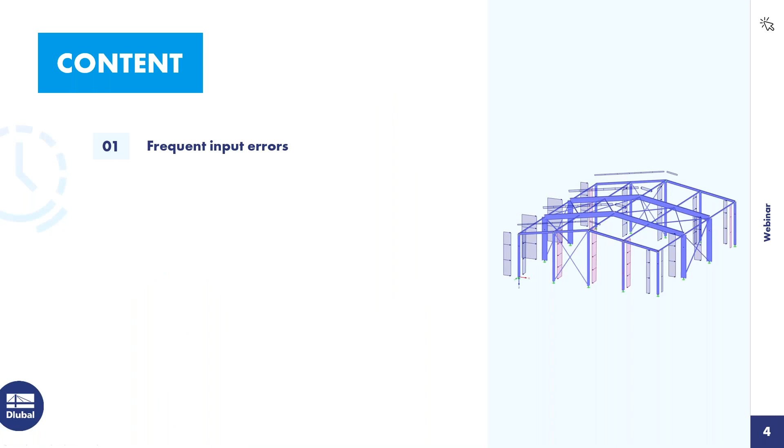To the content today: I will introduce frequent input errors and explain how to correct them. And I will give tips and tricks for the application, for example the FE mesh size, handling singularities, and correcting instabilities, etc.

To the first task: we often receive model files from customers for which not enough wind load cases have been created for dual pitch roofs. According to Eurocode, there are at least 4 wind load cases necessary for the wind direction 0 degrees, and 1 load case for the wind direction 90 degrees, in case it's a symmetrical model. In our example today, we handle only these wind load cases because it's a symmetrical steel hall.

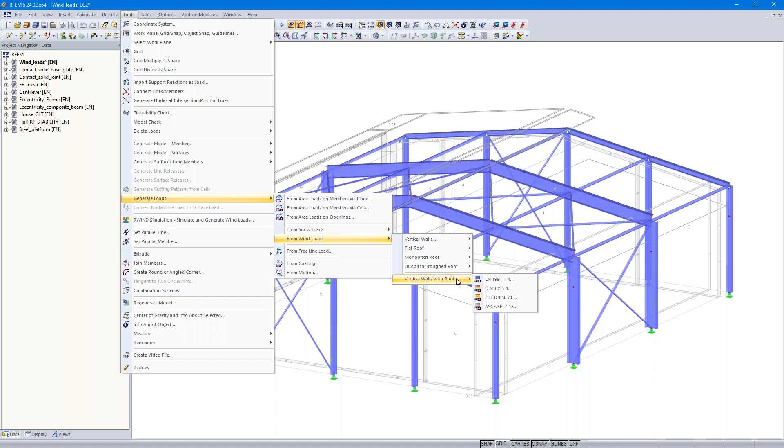Let's turn to the program. That's the example that belongs to the PowerPoint slide. I created a load case, self-weight, and then the first wind load case. It's an automatically generated wind load. For customers or users that don't know where to find it: under Tools, Generate Loads, there are a lot of load generators, for example for snow loads, and here for wind loads on vertical walls, flat roofs, monopitch roofs, dual pitch roofs, and vertical walls with roof. I use this option here.

Okay, let's open the wind load generator. Here you can choose the national annex, the terrain category, structure height, and then you need to define the base geometry by clicking 4 nodes, and the roof type and geometry by clicking 6 nodes. This area here is for the wind direction; in this case I used the AB wind direction, meaning for our example the wind direction 0 degrees. This area here is important for the load on the roof. Those are the 4 wind load cases necessary according to Eurocode: plus plus, minus minus, minus plus, and plus minus.

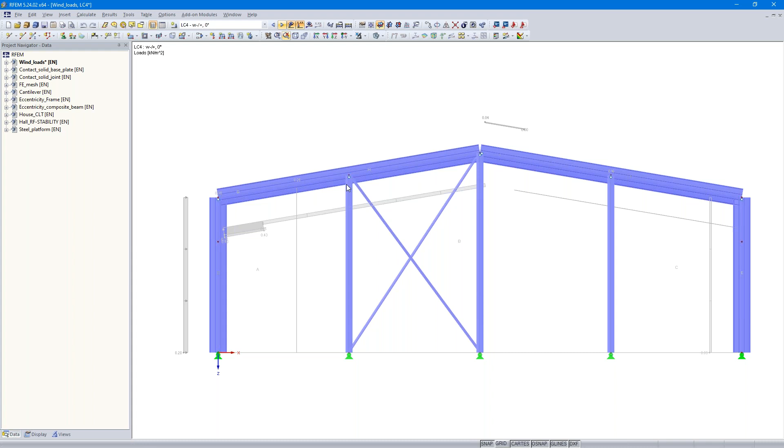Okay, I leave the dialog and switch to this view. You can see 4 wind load cases for the wind direction 0 degrees are created. The first wind load case has pressure on both sides, then suction on both sides, then suction and pressure, and pressure and suction.

Then we turn to the next load case for the wind direction 90 degrees. I open it. The upper values are the same, but the wind direction is now BCD, which as you can see in the picture is 90 degrees. I created, in this case, 2 wind load cases: pressure and suction. Important according to Eurocode is the wind load case number 7 with the suction.

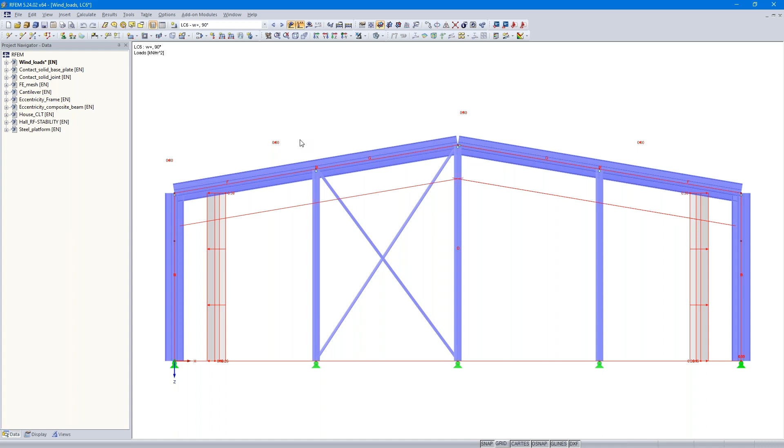Load case number 6 does not contain any pressure wind loads on the roof. It could be possible to consider that the suction from the roof acts as supporting, but that depends on you. Important according to Eurocode is this wind load case here.

Okay, that's all to the wind loads. I turn to the next task, imperfections.

I create a new load case, imperfection towards plus X. I would like to create imperfections for the outer columns on this side and on this side.

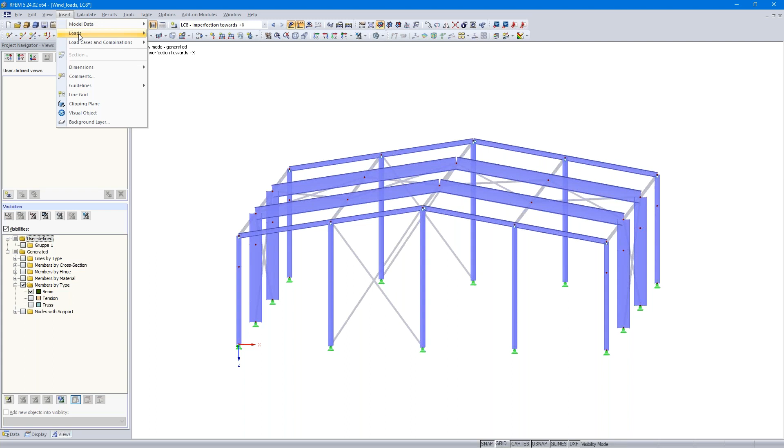I turn to the views navigator and use the visibility mode for beams. Then I open insert, loads, imperfections dialog box. I don't care about these values here. Important for me today is this area: members, list of members, sets of members.

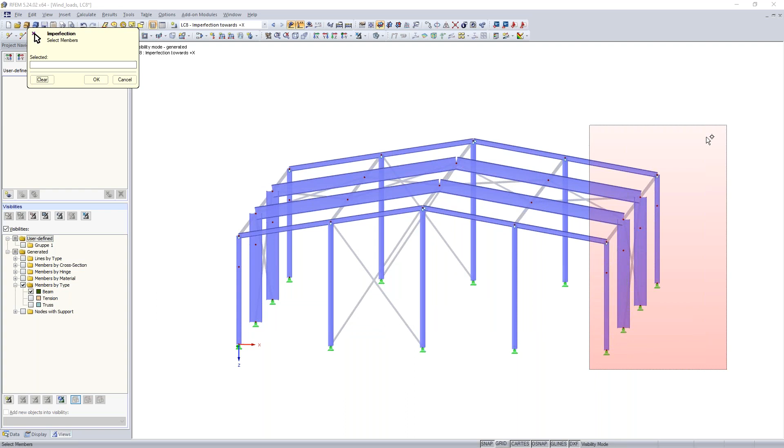I select the members. Now I use the wireframe model. The imperfections are created but wrong, because the column is divided by a node.

This is because of the load in load case number 1. Here's a load on the support from a console, etc. And therefore the member is divided, which causes the imperfection to be wrong.

How to create it correctly, I will show you. So I insert loads, imperfections, and I use the function list of members.

The disadvantage is that I can only use one column, because I can use the list of members only for members that are connected. Let me show you what happens.

Now the imperfection is created correctly. I can copy that imperfection easily 3 times from this node to this node.

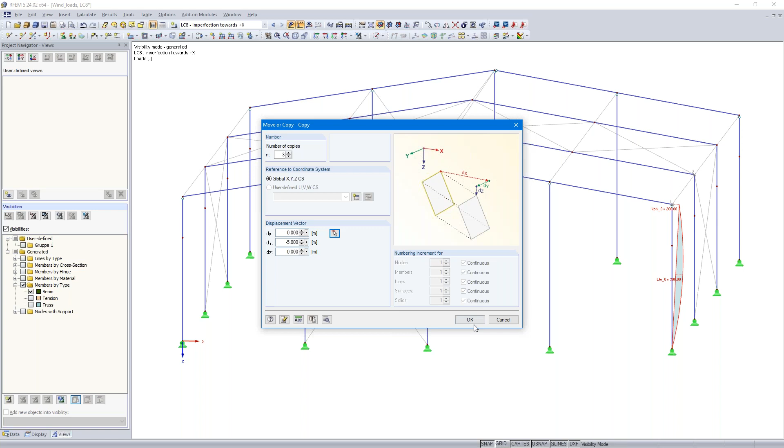Another option would be to copy that by selecting all imperfections and then using the CTRL key, then copy via drag and drop. Those are the right imperfections for the outer columns.

But I would like to show you another option, in my eyes a better one. I first create sets of members. I select all the members, then open via right click the context menu, member, and then create set of members.

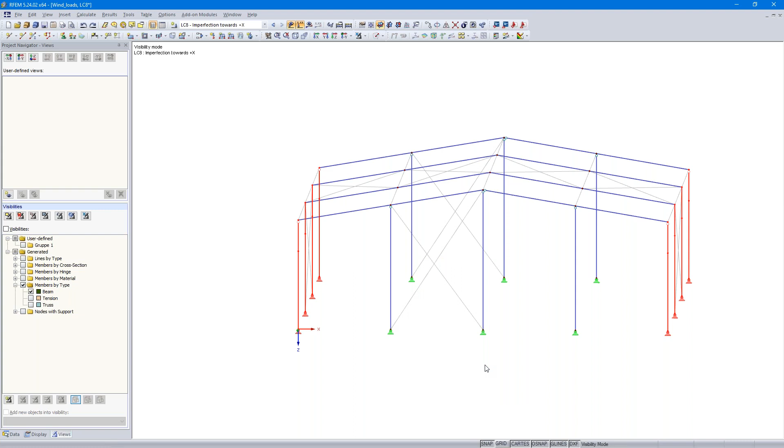8 sets of members are created now. So then insert again, loads, imperfections, dialog box, and now I use the function sets of members here.

And I can select all. Now the imperfections are correct as well.

So that's all to the imperfections, how to create them correctly. The sets of members in this case are useful anyway, and I will describe why. It's not only for steel structures, but also for timber structures and concrete structures.

If a member, like for example such a column, is divided by a node, you need to define the set of members, or you need to adjust the buckling length. What I mean, I will describe now.

I go into the add-on module of steel EC3. I select only this column here. Go into detailed settings and use here for the stability design the equivalent member method.

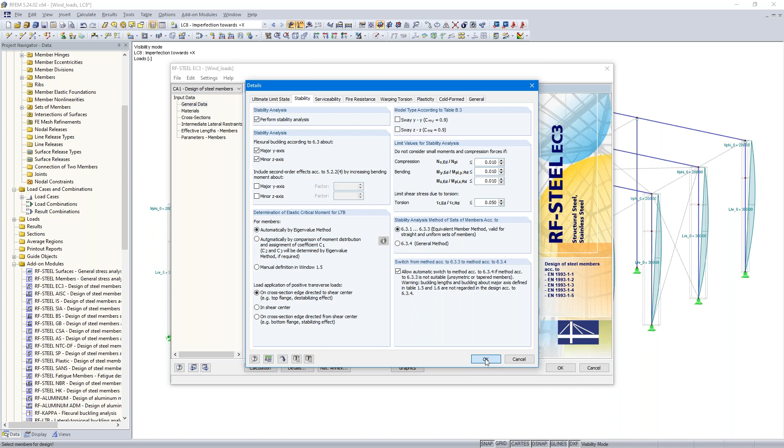I need to select one load case to get into this dialogue. In the dialog effective lengths members, you can see there are 2 members with incorrect lengths. The column has a length of 3.5 meters, but in this case we would design 2 members: one with a buckling length of 2.5 meters and this one for 1 meter.

How to do it correctly? We delete the members and select the set of members instead. Now the add-on module uses the right buckling length of 3.5 meters.

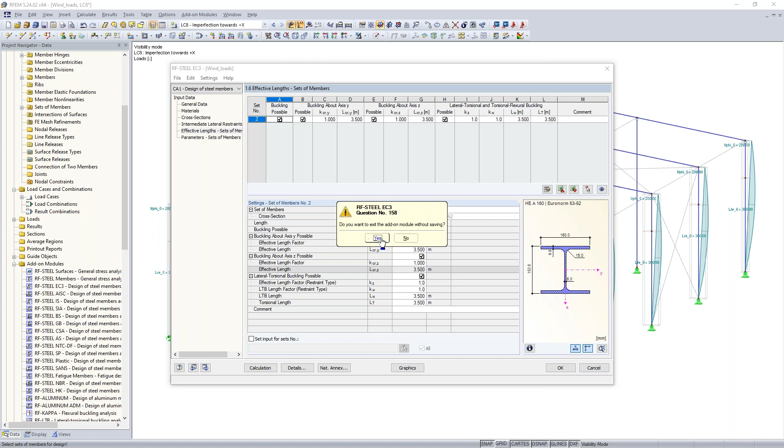It's quite important, and a mistake that users sometimes or often make. Okay, that's all to this model. Let's turn to the next model.

Contact solids. A lot of users have got problems with contact solids. It's a very valuable function, the contact solid, to define contact conditions between two surfaces.

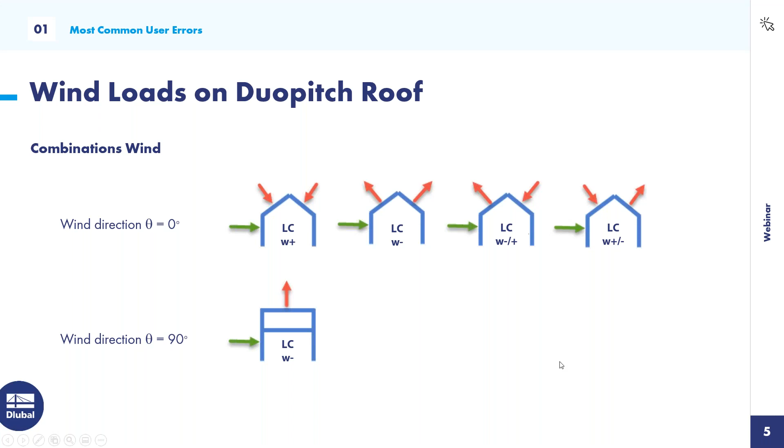What I mean with that point, I will show you now. So that's a steel plate with a thickness of 20 millimeters, and here are stiff surface supports. Could be that the plate lies on concrete, etc.

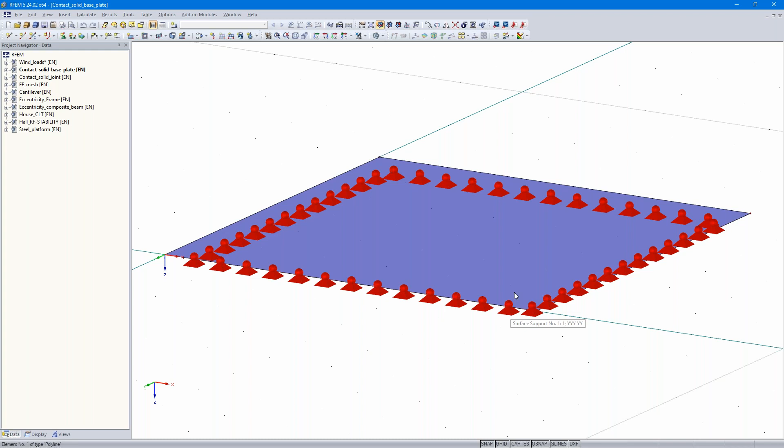Now I would like to copy that plate, and the other plate should lie on this plate - two steel plates, one directly over the other plate. The usual workflow is to copy that plate.

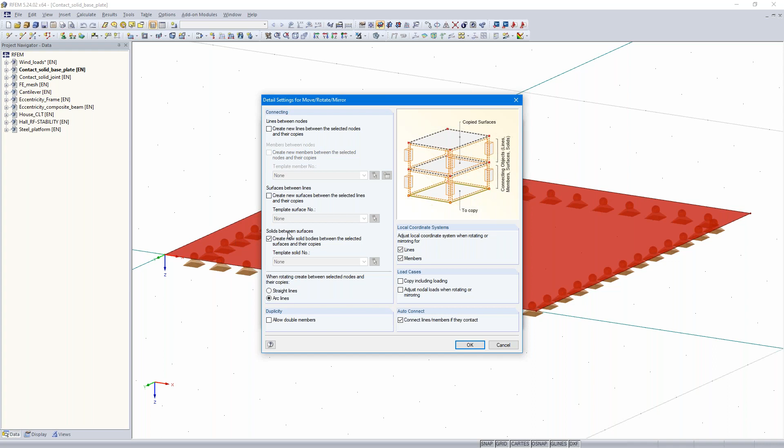1 time, minus 2 centimeters. Then here I open the dialog and create a solid between the surfaces. Now the column base plate is created, and a solid between the 2 plates.

Let's model the column. First, I create a node between 2 points - here in the middle, 50% - and that point.

Then I use the same function, copy, or a similar function, minus 1 meter. But this time I don't create a solid, but a member.

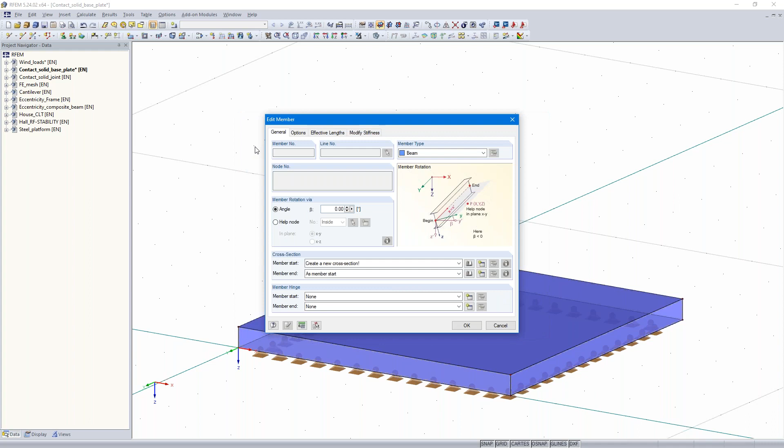So I choose HEA 200 from steel S235.

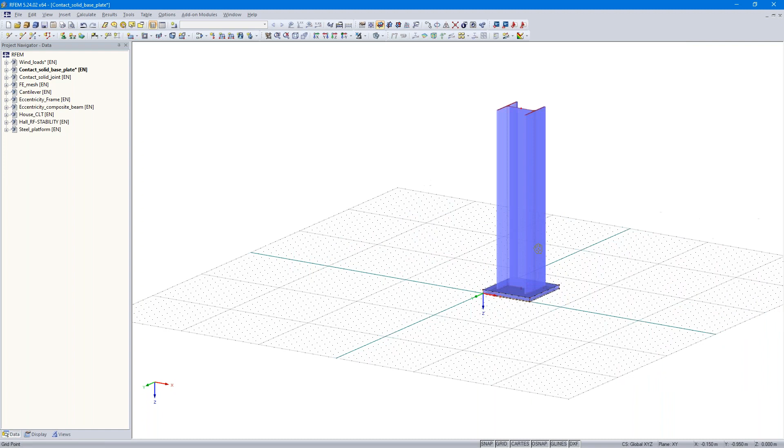Okay, it is created, but it is still a member. By right click, I create surfaces using the function generate surfaces from member. Okay, now those are surfaces.

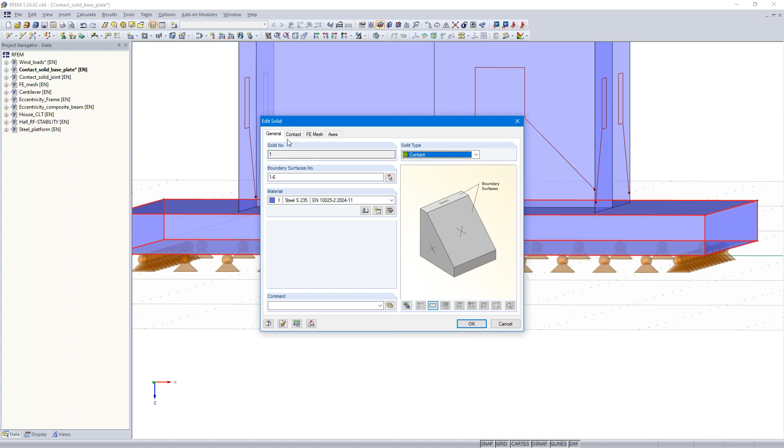Okay, then I change the solid to a contact solid by double click. I change the solid type to the type contact, and there's a new dialog here, contact, and I can define the contact conditions. I select the first surface, the lower plate. It is the original surface, and the opposite surface is detected automatically from the program. That's the upper plate here. Then the contact conditions perpendicular to the surfaces, failure under tension, and I define here parallel to the surfaces a rigid friction.

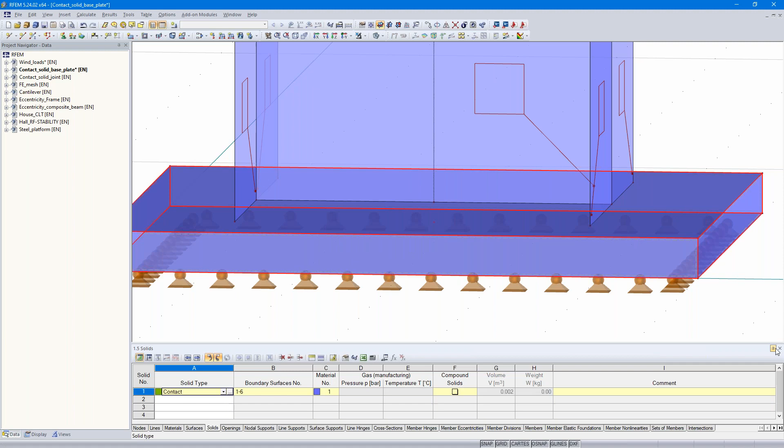0.2. Okay, and now I create or generate the FE mesh and get an error message: numbers of integrated objects in contact surfaces do not correspond. And that's correct. There are lines and nodes in the upper surface, but not in the lower surface. How can we handle this? I go again in the solid and I select the upper plate as original, and then the integrated elements are copied internally to the opposite surface, in that case the lower surface, and then the FE mesh will be generated.

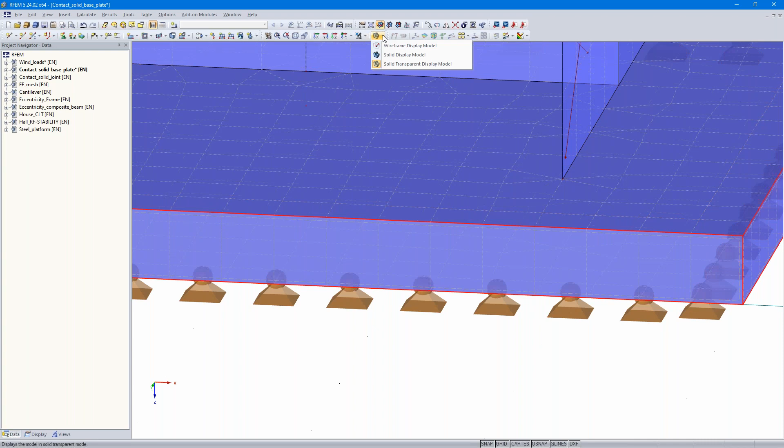Let's try it. Calculate. Yeah, now it's correct. And as you can see in the upper plate, there is a disorder in the FE mesh because of the node here. Let's take a look at the lower plate. Here you can see the same disorder, because there is an internal node copied from the upper surface. That's why the FE mesh is the same for both plates, and now it is correct.

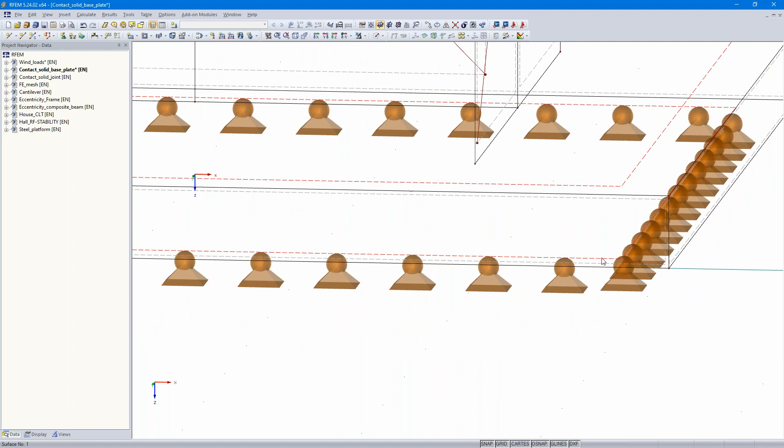Another way to define the solid, I will show you now. Okay, I delete the solid and then select both plates, and then by right click I select the feature create solid with contact. Now you can see the lines and nodes are copied not only internally, but copied right to the lower surface. And that causes both plates to have the same integrated objects.

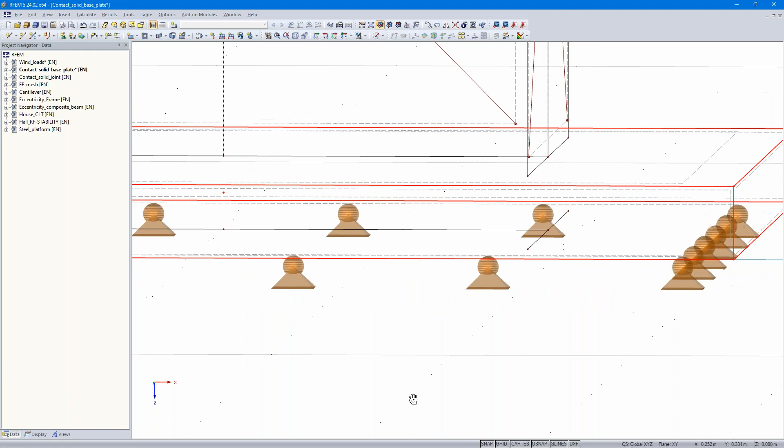So now at first I define the right contact conditions, failure under tension, again the friction, okay, and I generate the FE mesh. Next error message. That's a FE mesh problem.

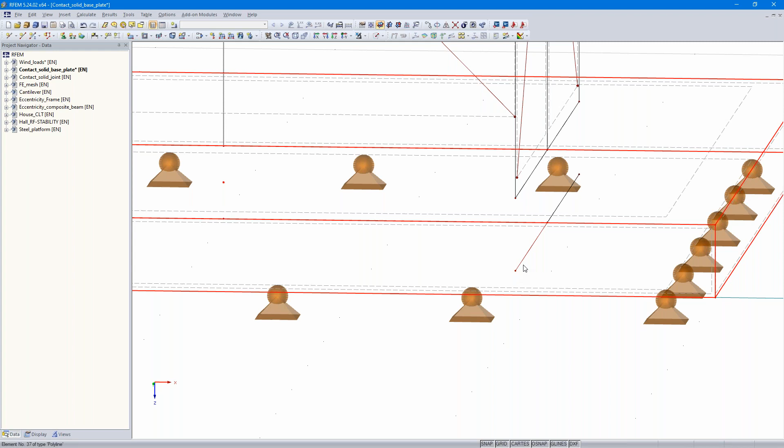The lower plate doesn't need the lines and nodes. There are no surfaces or members connected to these lines, and therefore the FE mesh generator doesn't take care of these integrated objects here. I need to open the FE mesh settings and select here integrate unutilized objects into surfaces. That's important in this case. Okay, and now we can generate the FE mesh. Now it's okay.

Now the first option that I showed is the favorite in this case here, but sometimes you can only use the second option. I'll show you an example.

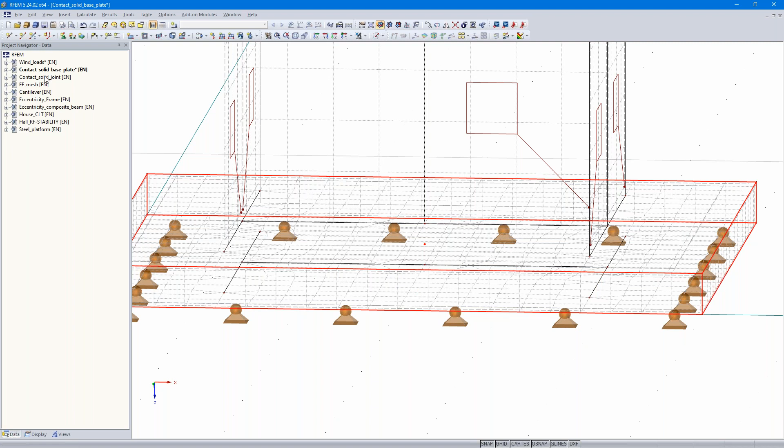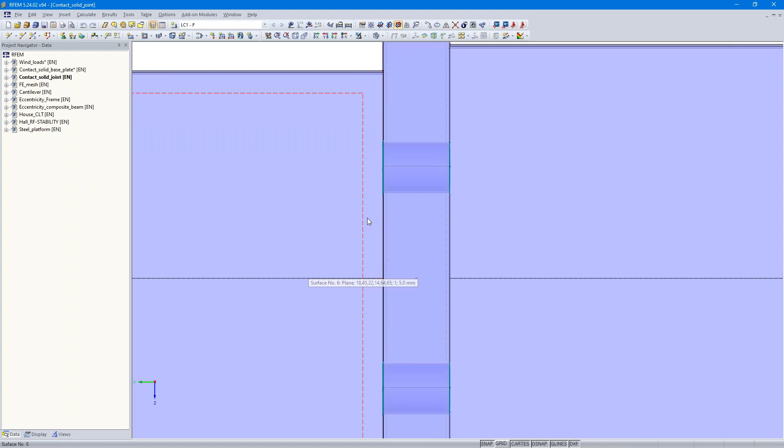Now that's a single span beam. Here are members, and here's the member divided into surfaces, and here in the middle are two plates, a solid between the plates, and also boards, all is defined. I need to define the contact solid, but let me show you what's special here. Those lines here, or those surfaces, are from an IPE 160 and here IPE 180. That's the reason why the integrated objects are not the same for both plates.

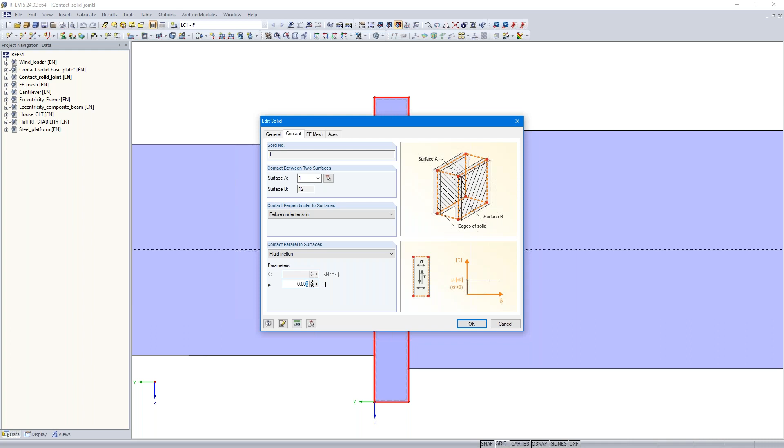And therefore, I can use only one option, or let me show you what doesn't work. So contact, failure under tension, rigid friction, a very small friction factor in that case, so that the bolts get the whole shear force. Okay. So, and then calculate, generate FE mesh. Yeah, that's the error message. Okay, let's try the other option.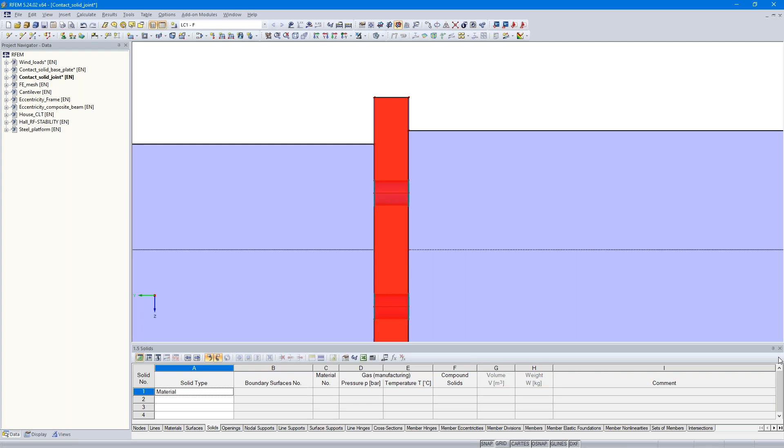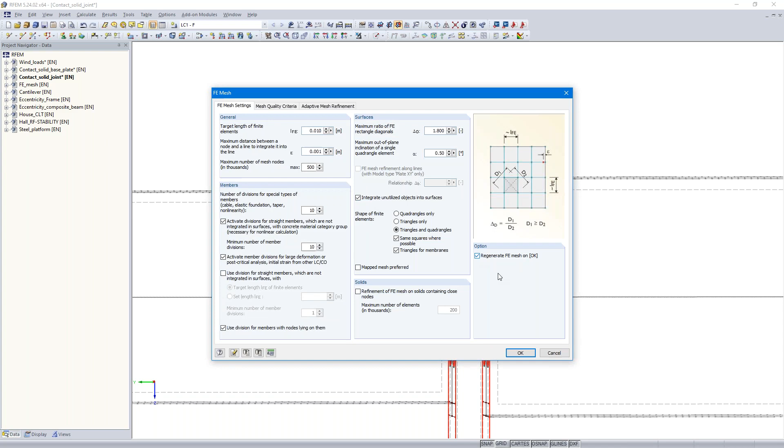So I select both plates here and create solid with contact. Now the lines and nodes are copied from the right side to the left and from the left side to the right. Okay, I define the contact solid again. Now I don't need to forget to change the FE mesh settings, integrate unutilized objects, and then I can generate the FE mesh. Okay, that works.

Okay, I hope these tips could help for the solids, or especially the contact solids. Then we turn to the next example, FE mesh.

We often get the question, what's the right FE mesh size? Yeah, there's no general answer. It depends on the model. But what we can say is that we can refine the FE mesh until results do no more change significantly.

You can see here a very fine FE mesh. Disadvantage of such a fine FE mesh is the long calculation time. At least if you have got complicated models, you often calculate models that are not so easy like this one here.

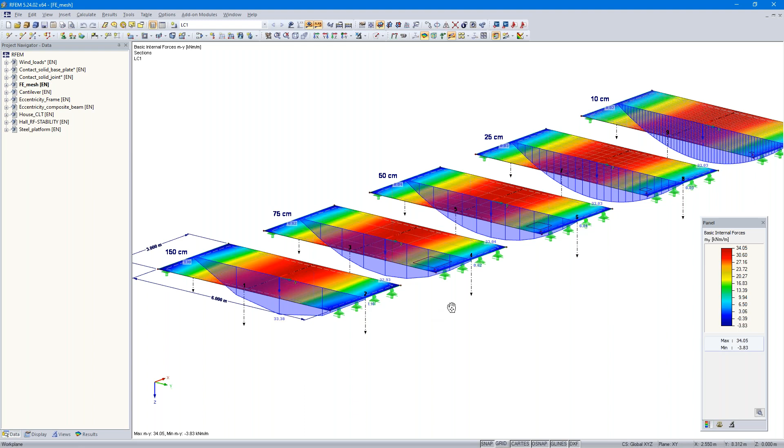Let's turn back in the display navigator. The other option here, constant on elements. You can see here very large FE mesh, very large FE mesh size, 150 centimeters. Also, this FE mesh size is quite large, 50 centimeters. It's in my eyes okay, and the favorite in that case here.

And you can see here the results are comparable. And if I switch to continuous within surfaces, I smooth the results more. You can see also for this large FE mesh size, the results are quite okay. But this one I think is better.

Let's compare the results for this 4 slabs. By the way, the slab has a thickness of 200 millimeters and it spans for 6 meters.

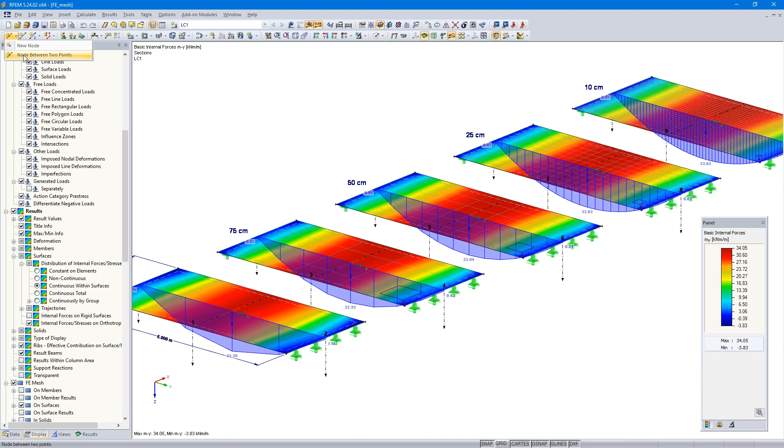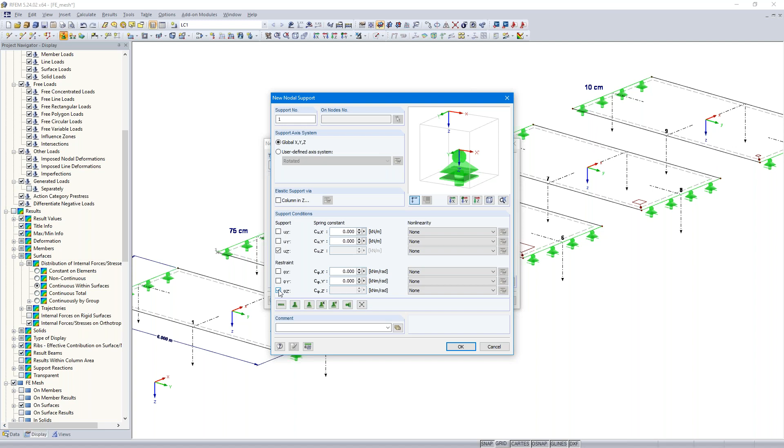So I define a nodal support. At first I create a node between 2 points, as I did it before. In the middle. And now a nodal support, only in Z direction. So then I copy it 3 times. Okay, then we calculate our new.

So, and here you can see that there's a singularity. But I recommended to use FE refinements for FE mesh sizes that are larger, but okay. Let's do it.

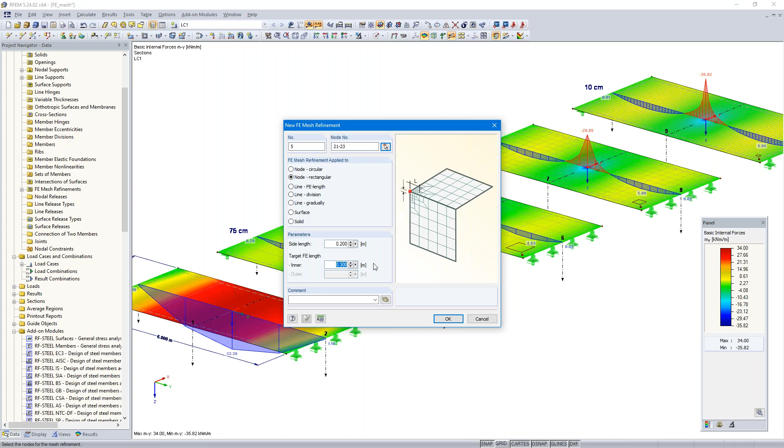New FE mesh refinement. Rectangular on the nodes. This one, and this one. I don't need it here because the FE mesh is already 10 centimeters. Side length is 20 centimeters and the inner length 10 centimeters. Okay, so then we calculate our new.

And now you can also see for the other slabs that here is a singularity, because the nodal support has no dimensions, for example dimensions of the column - it's only a point, a peak, and that's why there is a singularity. How to handle this?

We can smooth the internal forces with an average region. I create an average region now. The first on this point. Dimensions - in this example, I use 40 centimeters. This could be the dimension of the column. And I smooth, or I would like to smooth the internal forces in all directions.

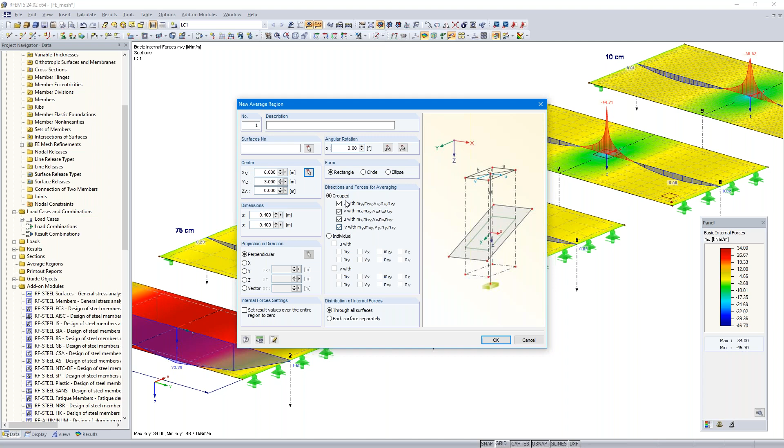And I select all surfaces, or all 4 surfaces, to be able to copy it from this point here to the other surfaces. I use the function drag and drop by using the CTRL key. Oh, that was not so good. So that's correct now.

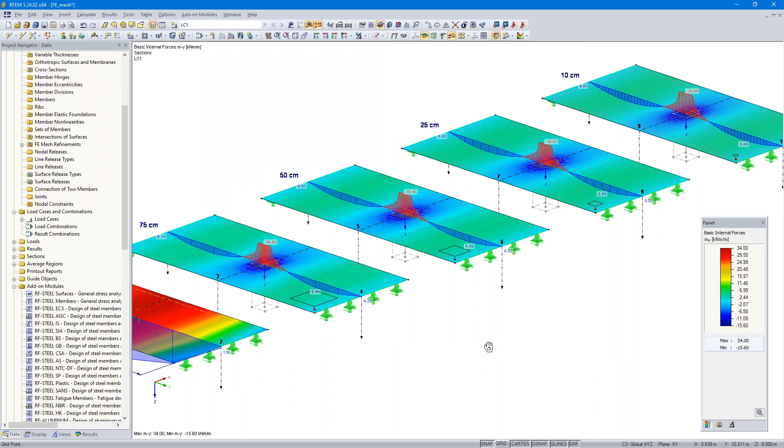Now you can see for all 4 plates, the results are smoothed with an average region. The results are quite similar for the field and over the column. Okay, that's all to this example.

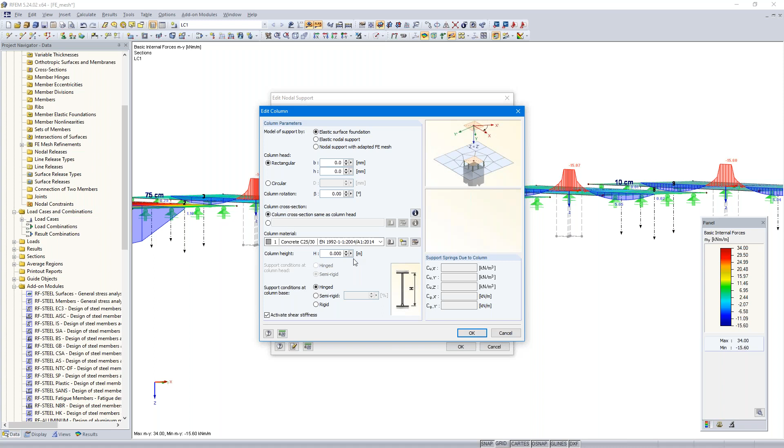Maybe another hint: you can define here not a stiff support, to consider the elasticity of the support, with this feature here, elastic support via column and set. And then you can define here the dimensions of the support or of the column, the material, height, etc. But I don't do it in this case here.

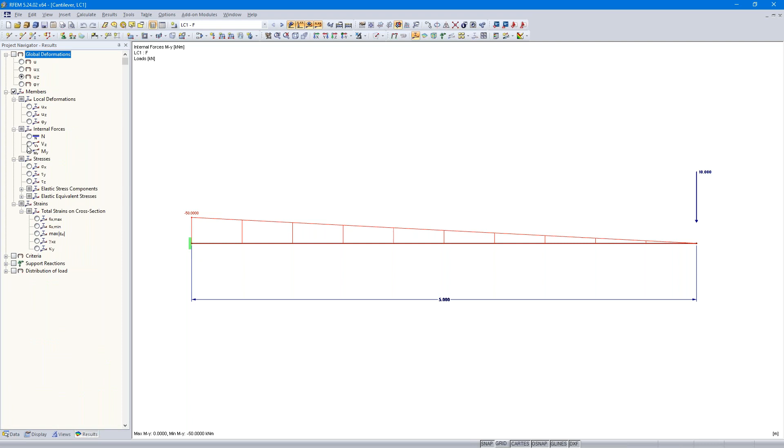Okay, that's all to this model. We turn to the next model, a very simple model, cantilever. So we can easily calculate the moment here, 10 kilonewton multiplied by 5 meters, 50 kilonewton meter. Shear force is exactly 10 and the normal force is 0.

But when I switch to the load combination with only load case number 1, there's a small normal force. It often happens that you get internal forces which you haven't expected, and that's a good example here to describe it. And in this case, it might be due to the fact that the internal forces have been referenced to the deformed structure.

Let's turn, and you can also see here the shear forces are not exactly 10. So let's open the calculation parameters, load combinations. And for load combinations, the calculation is performed by default according to the second order analysis.

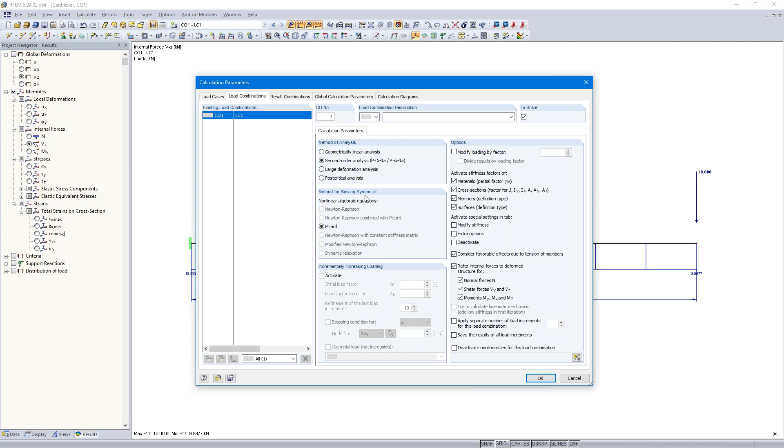And the internal forces are referenced to the deformed structure, as you can see here. In my eyes, this is close to the reality when you have small deformations. In the case of large deformations, for example tensile membrane structures, you should use the large deformation analysis. Okay, but those are the default settings for load combinations.

Okay, we can leave the dialog. I show you the deformed structure. And you can imagine if the load vector is on this point here, the point of the deformed structure, the angle between the load vector and the beam is not 90 degrees. And that's why there is a small normal force, and also the shear force is not exactly 10 in this case. I think with this deformed structure here, you can imagine what's the reason for such internal forces that you wouldn't expect.

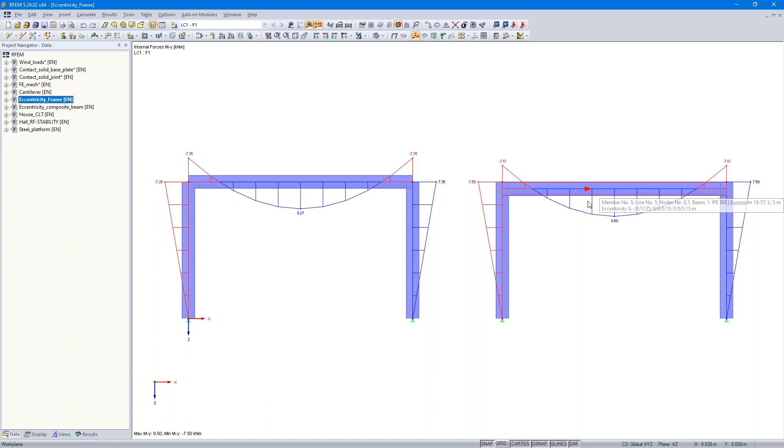Another cause for unexpected internal forces can be eccentricities. You can see here two frames. The left frame has no eccentricity, but in the right one, the horizontal beam has an eccentricity. That's why we get the offset in the internal forces here, in the My internal forces. Here's no offset without eccentricity, but here, because of the normal force in the horizontal beam and the eccentricity, there's an offset. You should consider where eccentricities are useful and necessary, and consider that offsets occur.

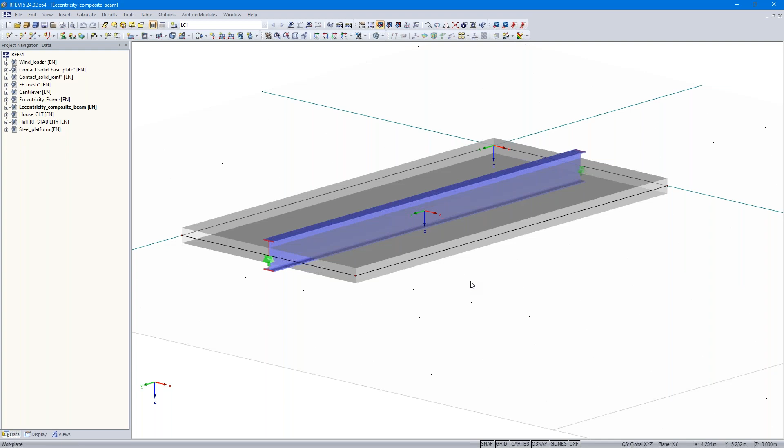So, for such models, or if you would like to create a composite beam or a plate over a beam with a loose or elastic support, then you need to define an eccentricity. Let's copy that model here - one time, 6 meters in X direction. And now I create an eccentricity.

Options - here I can define member eccentricity. I use the function relative offset. The upper side of the beam should be on the lower side of the surface. Number 2. Okay.

Now there's the right eccentricity. We can calculate it to compare the results. So the My internal forces, we can compare it for the beam - about 90 kilonewton meter, and here about 40 kilonewton meter. Now there's an eccentricity and a rigid connection between the beam and the slab.

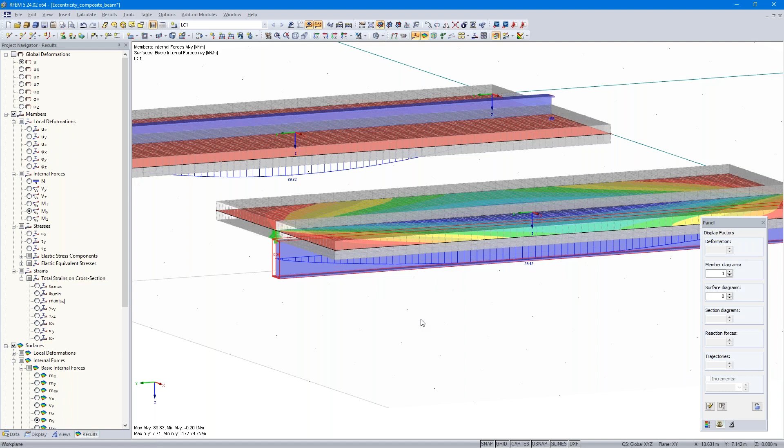You can use it also for other materials, for example, timber beam and a timber slab or a CLT slab, but then you need to define an elastic support or a loose support. If you want to do that, you need to use the function line release.

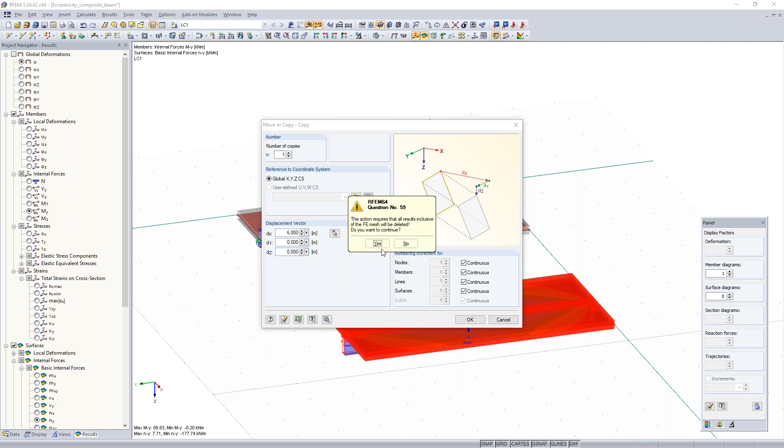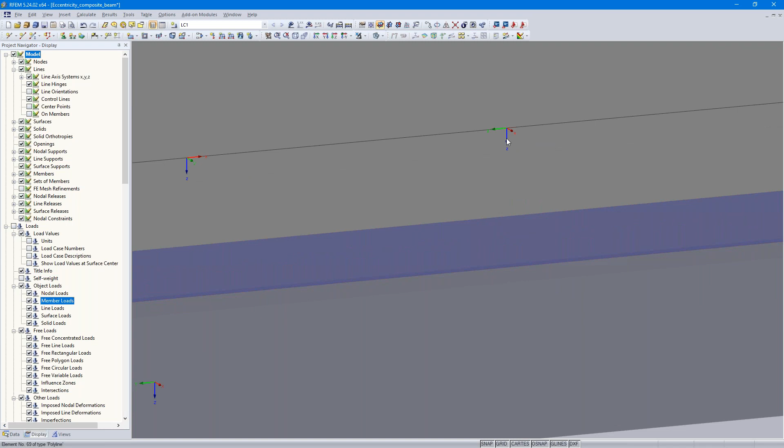So we copy that model again, one time. Before I define the line release, I switch on in the display navigator, under model lines, the line axis system, so that you can see how I define the direction of the nonlinearity. At first, I would like to define a loose support. That's the line axis system - the plus Z axis is downwards.

So, okay, and now I define the line release. Here, new line release. At first I select the line, and here I define the line release type. I define a small spring constant here to avoid the entire displacement of the plate in X direction. And here the loose support, and then I consider the nonlinearity fixed if positive uz. So that means that in Z direction, in the case of loading in the direction of the positive Z axis of the line axis system, the connection is fixed. In the opposite direction, it is loose. Then I need to define the released object - the surface, this one.

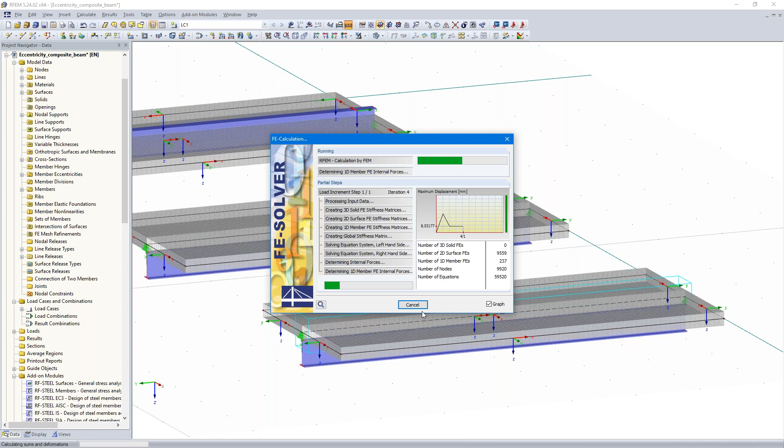So now I calculate it again. Let's compare the results - 90 kilonewton meter, where the beam and the slab has the same center of gravity. Then the composite beam, about 40 kilonewton meters, and here about 89 kilonewton meters. Similar to the first model, here we have got a loose support.

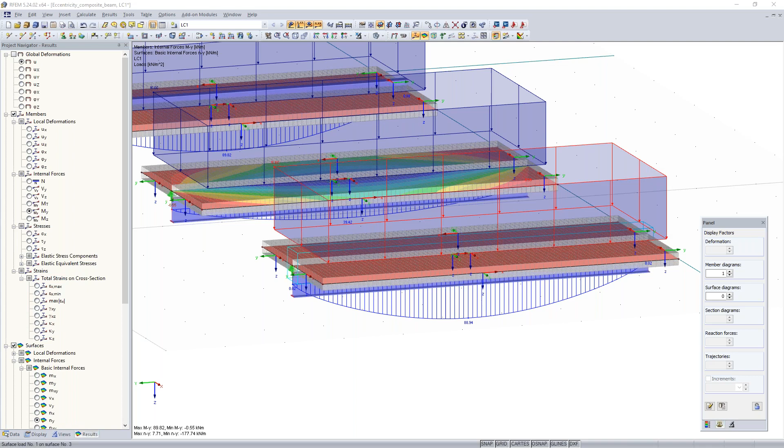So let's check if the nonlinearity is defined correctly. I change the load to -10, and calculate it. Now you can see a very large displacement - we can cancel the calculation. The plate would be lifted. So that's the proof that we defined the line release type correctly.

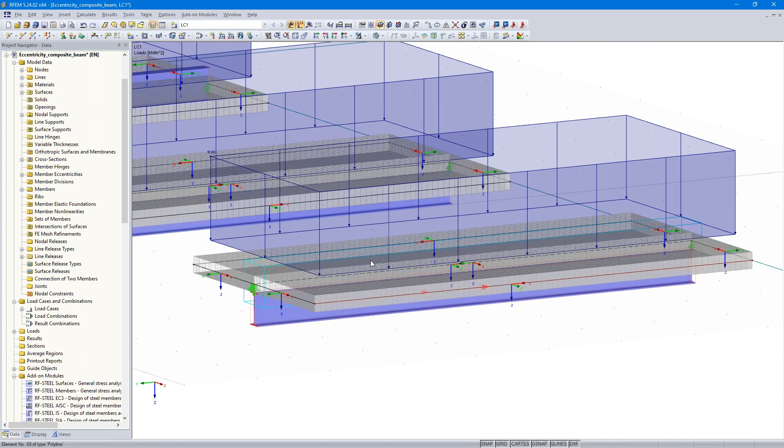So, to consider elastic fasteners, we need to define a spring in X direction. In that case, for example, bolts - imagine you've got a timber beam and a CLT slab, and there are screws in the connection. Then you can define here in the release type a spring constant for the fasteners.

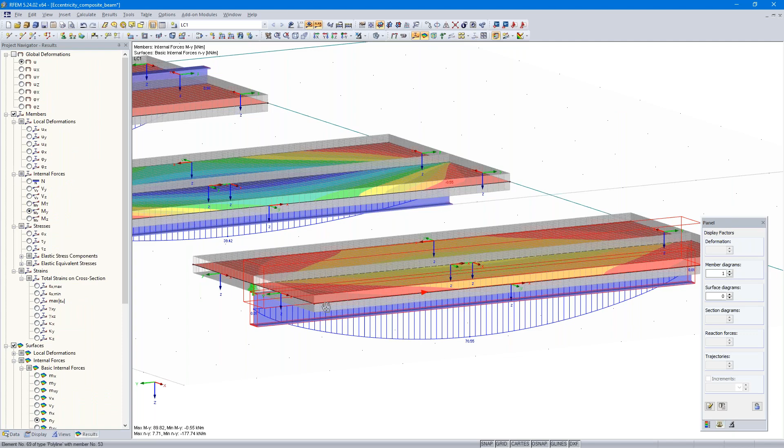So then let's compare the results again - 90 kilonewton meters, 40 kilonewton meters approximately at least, and about 70 kilonewton meters. You can define loose support, elastic support, or a rigid support, and how to do that I showed you in this example.

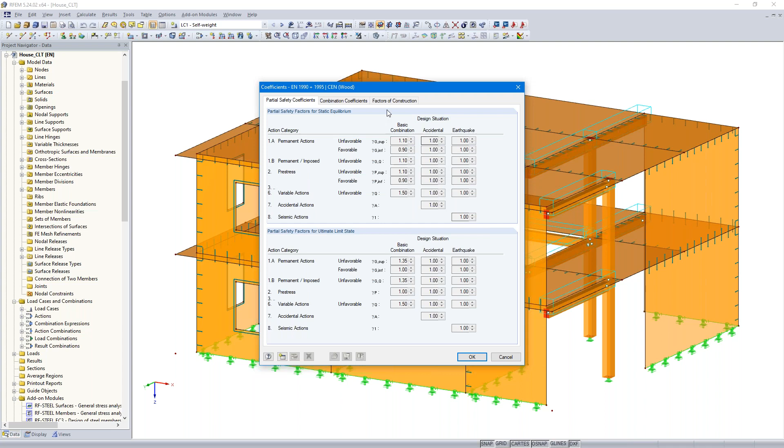Here you can define the national annex and edit the parameters. In this dialog, you can define the consequence classes and, importantly, the service classes. Service class 1 in this case, here's 2

and 3. You can also define a user-defined kdef factor. In this case we use this factor here for service class 1.

Since the creep parts for the serviceability limit state design are considered directly from the load combinatorics, you have to define the service class and thus the deformation factor, no matter which design module you are using. It's a little bit hidden, this factor, but it

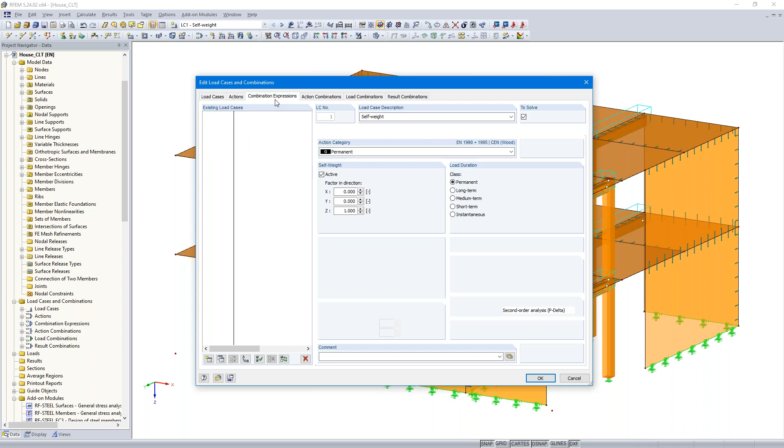belongs to the combinatorics. You can also find this in the load combinations dialog, on the combination expressions on the lower side here on the edge.

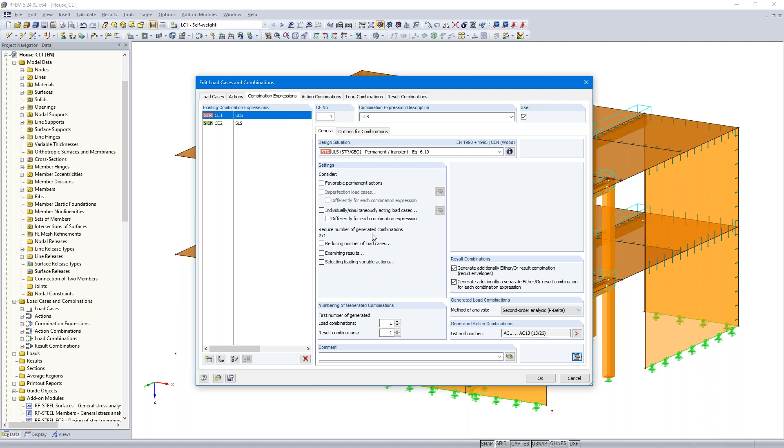Here you can define the kdef. Please don't forget to use Eurocode 5, so that during the automatic combinatorics, the serviceability limit state design factors are considered.

In this model here, I would like to give another tip. If you would like to connect two slabs, like in this case, with a line hinge, use only one line hinge, not two, when you connect two surfaces.

Otherwise it might be possible that you get problems in the calculation. If you've got three surfaces in one line, only two line hinges should be created. You need to define one line hinge less than the number of connected surfaces. That's a good rule, and then you don't get problems during the calculation.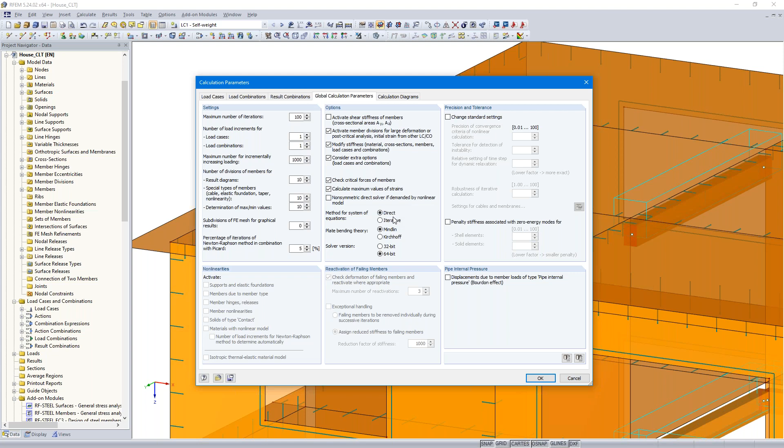Another tip here, not only for timber structures but for all structures: I open the calculation parameters. Customers often call technical support and complain about too long computation times, and they accidentally switched on the iterative solver. This is usually no longer necessary when using today's computers. The direct solver is usually the best choice.

Then we turn to the next model. We come to the last part of the webinar, to the instabilities. A very simple structure: in Y direction we've got bracings as tension members, and in X direction frames.

If we calculate the self-weight load case, we get the error message that the system or model is unstable. What's the reason? If you have load cases only with loads in plus Z direction, for example self-weight or snow, then it could be that you get such problems.

What's the reason? The node here is moving in plus Z direction, and that causes the tension member to get pressure and fail. All members fail, and then the model is unstable. How can we solve that?

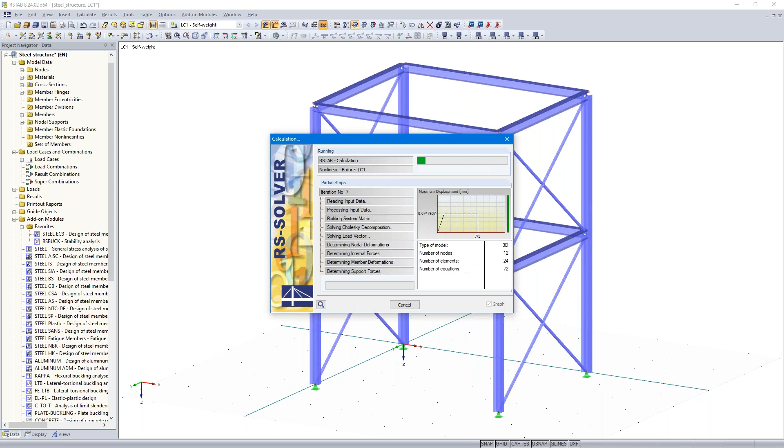Now these tension members have failed, and this one is still there, and this one, and that's why the calculation is okay for this load case.

If you have a load combination, for example with self-weight and wind in Y direction, the members here are reactivated. We don't lose them for the whole time.

Then the next option: assign reduced stiffness to failing members. Here the default setting is a reduction factor of stiffness of 1000, giving a very small stiffness to the tension members. Let's calculate it.

Now it calculates, no failure, but a small disadvantage is if I go to the result diagram, you can see there are very small negative internal forces, pressure, in such a tension member. You need to consider, if you document the results in the printout report, there are small pressure forces.

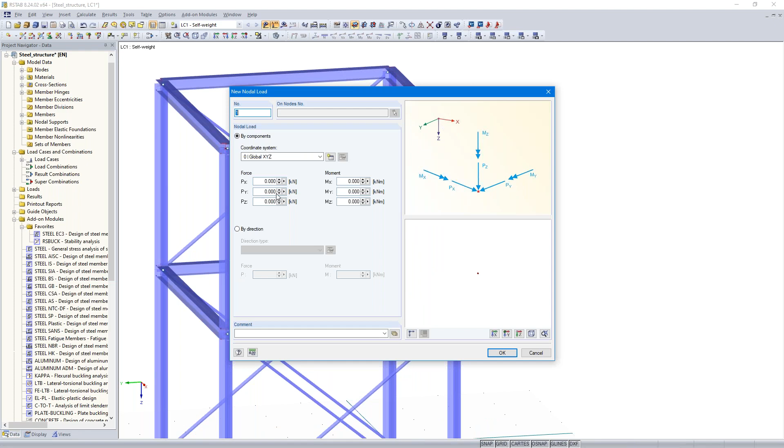Another option, if you would like to calculate the load case, is to define a very small horizontal load, 0.1 kilonewton, on this node, and then we can calculate it.

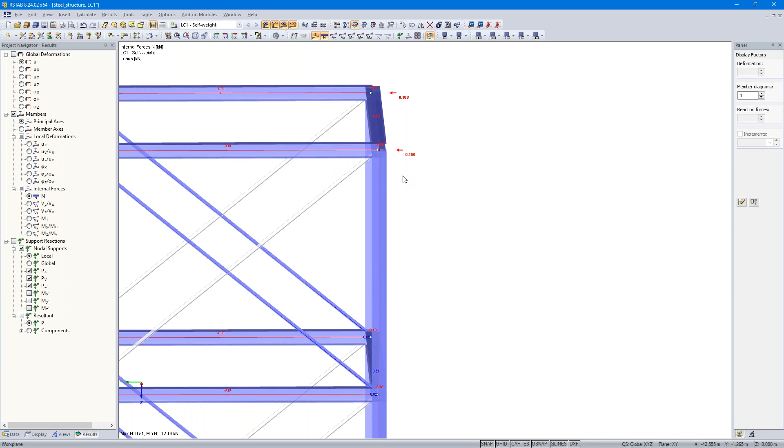Then the last option: I define a pre-stress on the member, on the bracings, on the tension members. Initial pre-stress 1 kilonewton in that case, and I can calculate it. So now we get results.

We turn to the next model. A simple steel hall, it could also be another material, it doesn't matter. I show you the loads. I created pre-stress for the tension members here for the bracings, and I would like to calculate all.

Okay, yeah, I get the error message: system is unstable. What can be the reason?

Imagine you've got the model from a CAD model, imported via an interface. There may be small modeling mistakes in the CAD model, or it was a transfer problem, and you need to search for the problem, or you modeled it incorrectly. For example, members are not connected correctly. You can use, under tools, the model check.

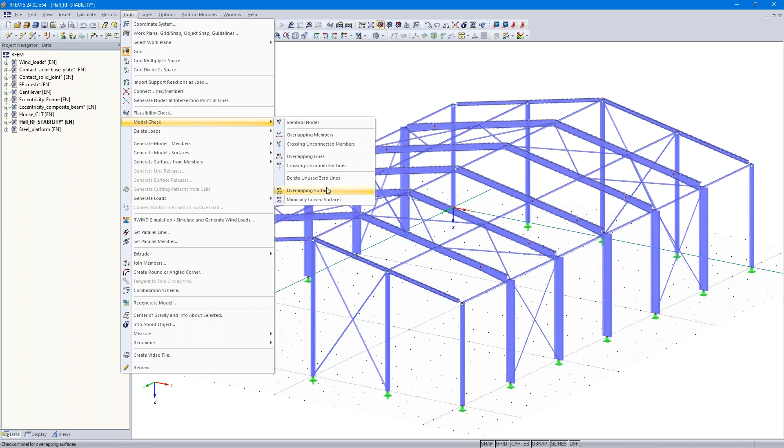There are different options here for the model checks, for example the identical nodes. You can search for identical nodes and define another tolerance here. In this case, that's not a problem, but you can find such model errors with this feature.

Let's try another feature. I use the add-on module of stability, and the feature to determine eigenvector for unstable model, so that causes of instability can be checked graphically. Let's try it, calculate it.

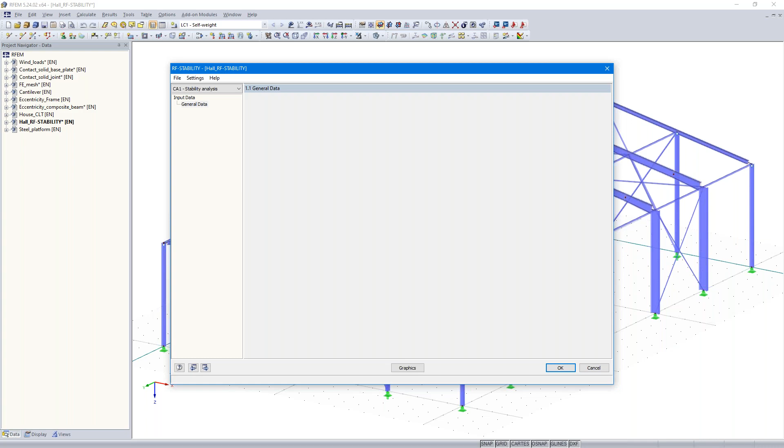Let's take a look at the graphic. You can see this frame is moving in X direction. Maybe you can see it again. I defined member end hinges here, and that's incorrect.

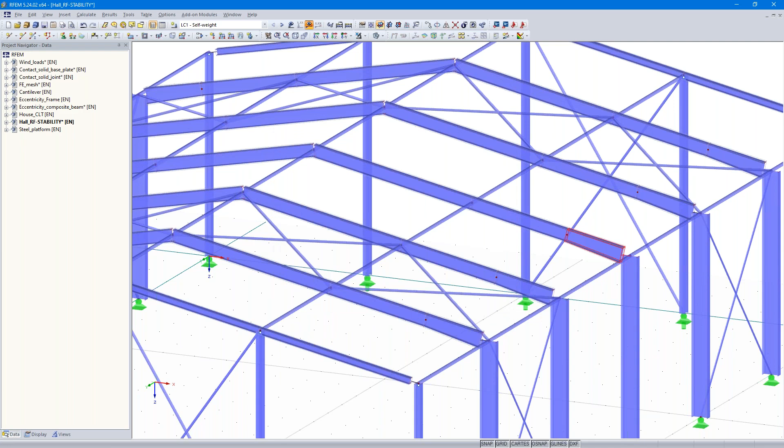It could be a transfer problem, or you modeled it incorrectly. So I corrected it now and can calculate it. Now it's correct.

Then we turn to the last model for today. I would like to show you another option to find instability problems: a steel platform, and I calculate it.

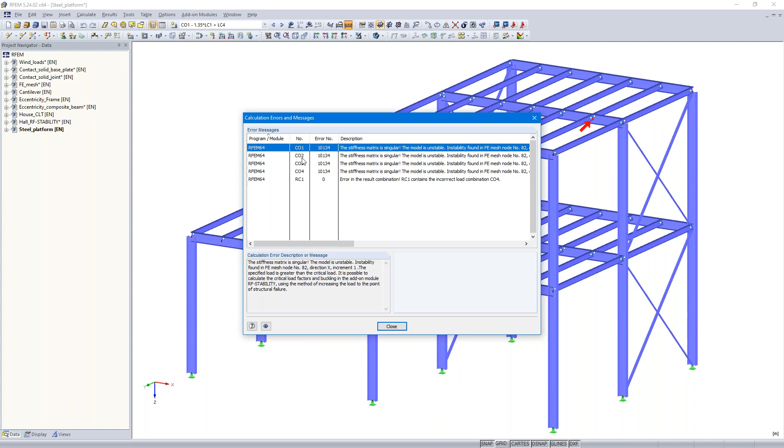So the load cases are okay, but the combinations are not okay. How we can handle this, I will show you now. For example, you can go to the calculation parameters. You can see here I use exceptional handling.

That is okay. Now I go to load combination number 1, which the program did not calculate: geometrical linear analysis, and I modify load factor to 0.1, so only 10% of the load is considered.

Okay, now I calculate it again. Now the load combination calculates with the very small load, and the inner frame is moving in X direction.

So let's search for the problem. I change the visibility mode. As you can see here, the same mistake: hinges on the edges here.

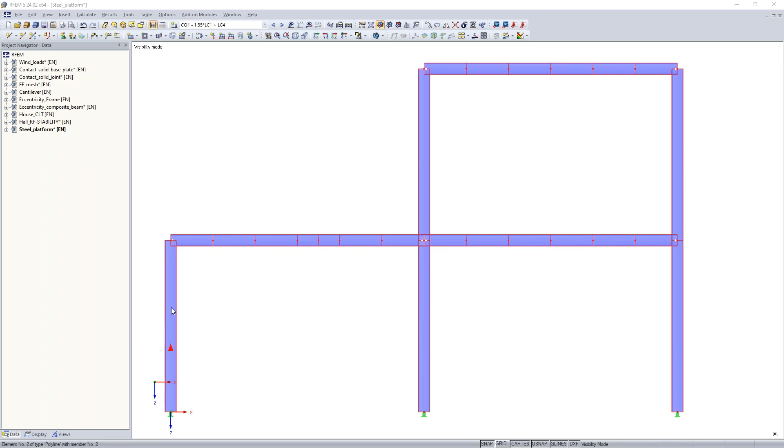Let's correct it. Double click, and then I can say here, no member end releases, or member end hinges. Okay.

So then I cancel the visibility mode. And what is very important, is to reset the calculation parameters when you find or found the problem.

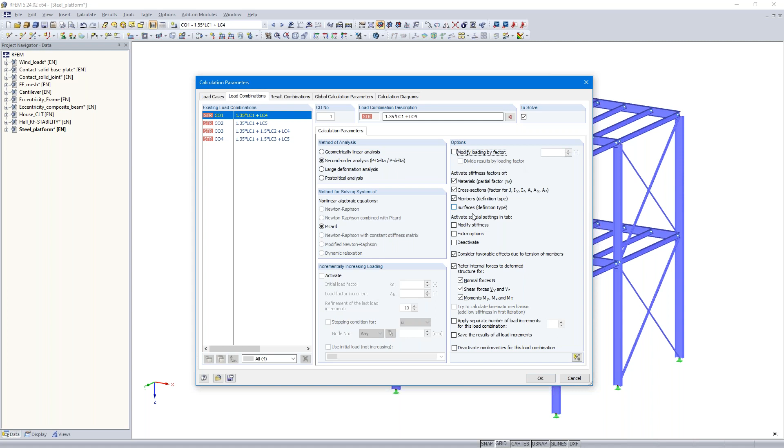So I select again the second order analysis and consider a loading factor of 100%. Okay, and then I calculate it.

So now it's corrected. Well, small deformations in that load case here. Now the model is corrected.

That's the end of the presentation in RFEM and RSTAB. I hope I gave you some valuable tips and tricks. Before I show you where you can find the recording in the next days, and already now the models and presentation slides,